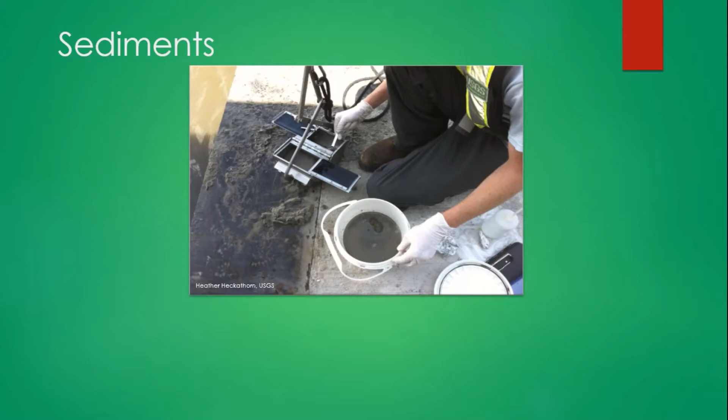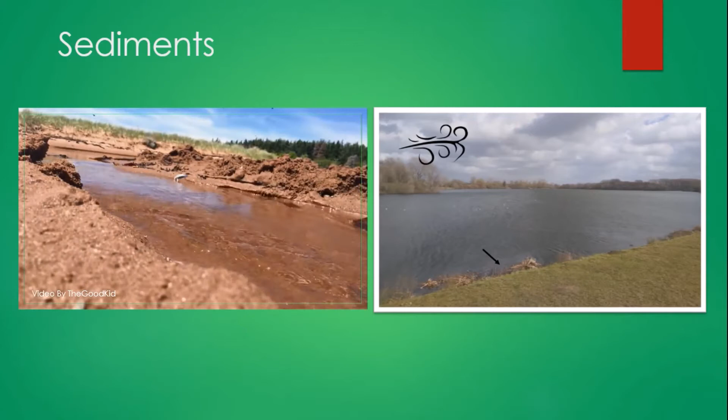Sediment is a solid material that is moved and deposited in a new location. It can consist of rocks, minerals, and other organic matter. It moves from one place to another by the effect of erosion, which mainly means by wind or by water.

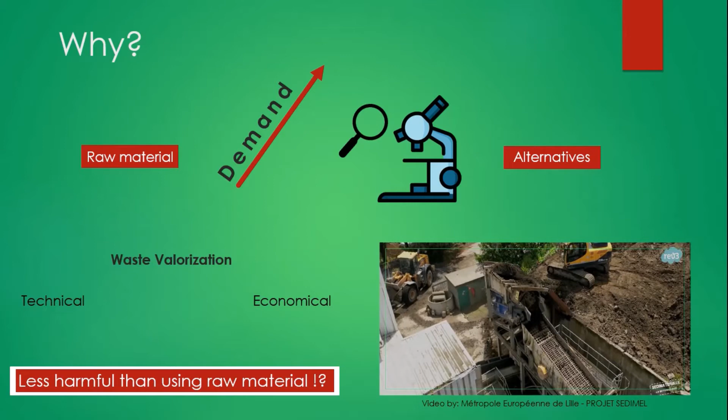So why are we handling such material? As the demand for raw material increases, that creates a need to find alternatives, such as waste valorization strategies, that can be a substitute in terms of technical or even economical aspects. But will using such alternative material be less harmful than using raw material itself? That's what we will discover in our work.

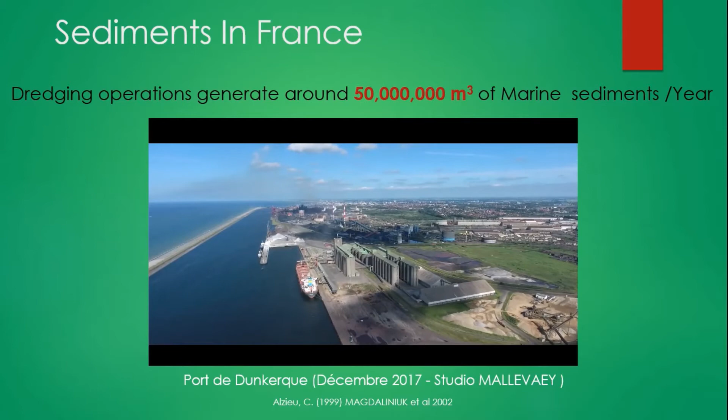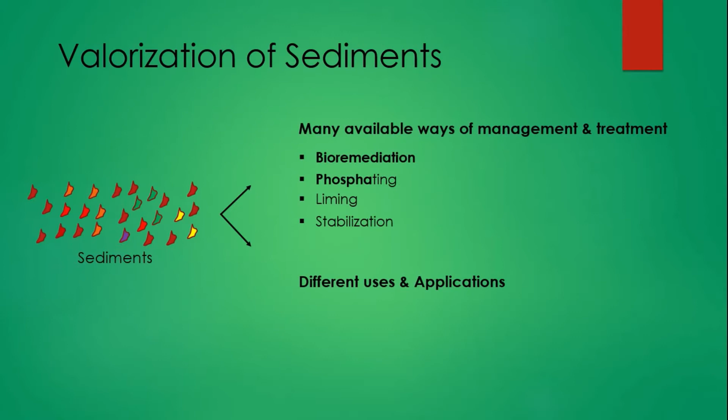So let's go back to sediments. In France, dredged sediment is classified as waste, and dredging operations generate around 50 million cubic meters of marine sediments each year, and 6 million cubic meters of sediments from rivers and lakes. So as a waste management strategy, these materials are treated and reused in different areas and different sectors, but this action is not sufficient in terms of sustainable development.

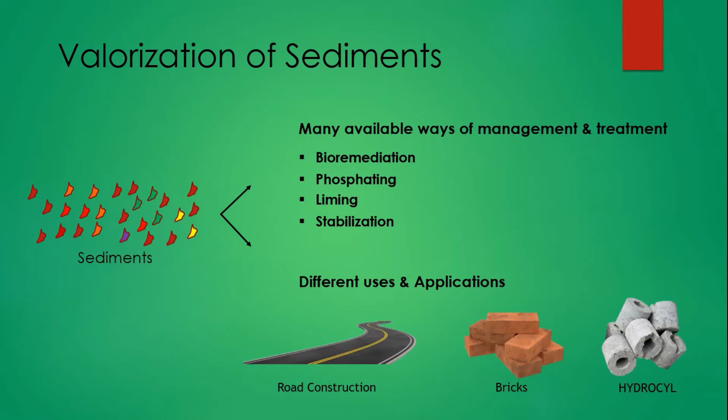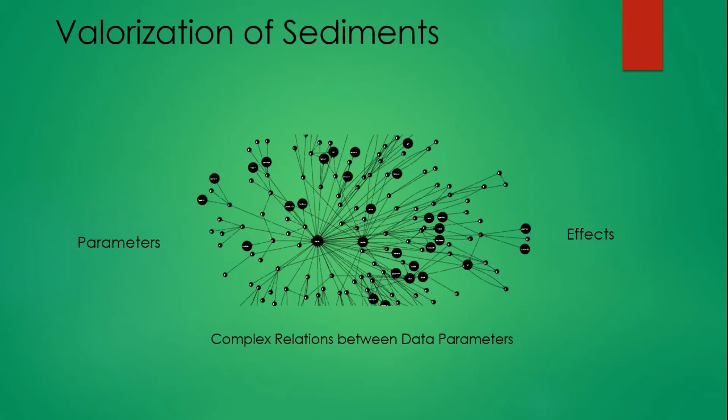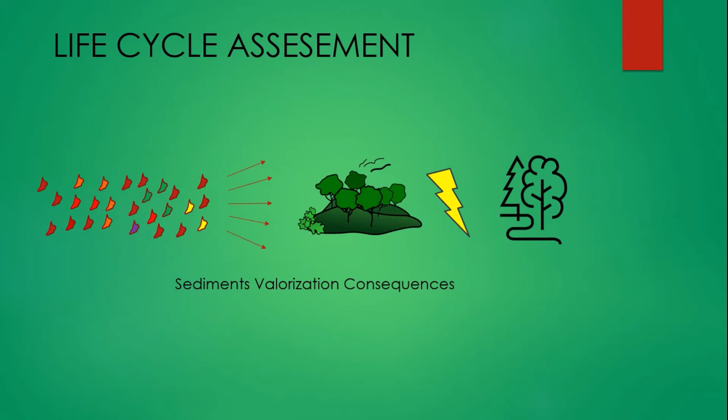And because this issue includes a lot of details and parameters, we chose life cycle assessment to facilitate the management of these data and their related results, which allows us to quantify the environmental impacts, energy usage, and natural resource consumption for the valorization life cycle. And we take a whole life cycle approach from dredging to transportation, treatment, and finally valorization.

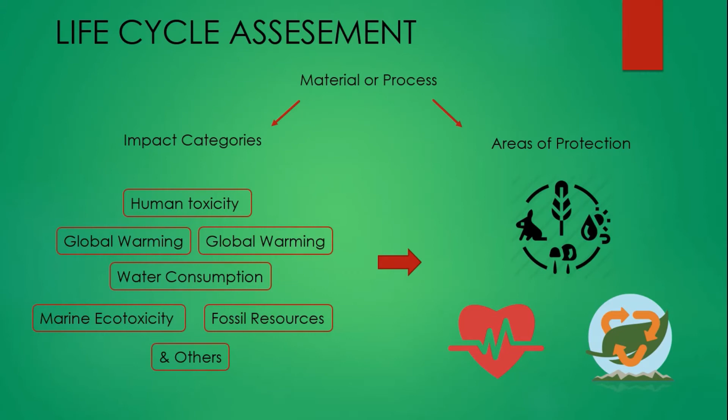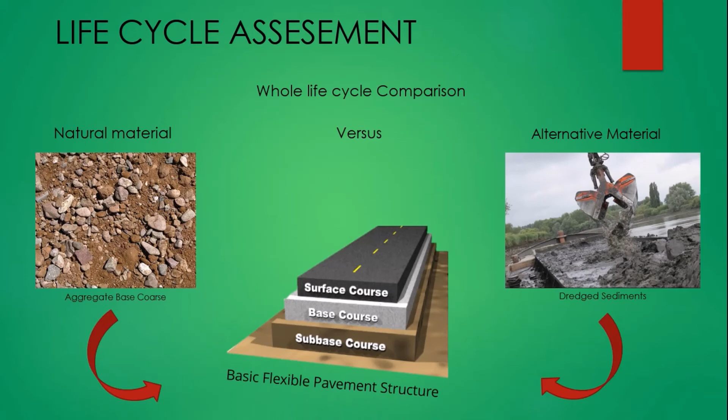Thus we can know which material or process contributes more or less to our impact categories, which describe several environmental problems, or to our areas of protection, which are a consequence of these impacts. So we can make a whole life cycle comparison assessment between natural and alternative material, as in our example for road construction.

Finally, our project doesn't just aim to help companies or decision makers to better reuse, treat, or manage these sediments, but we also help them to know which is the most sustainable choice among the different choices they have.